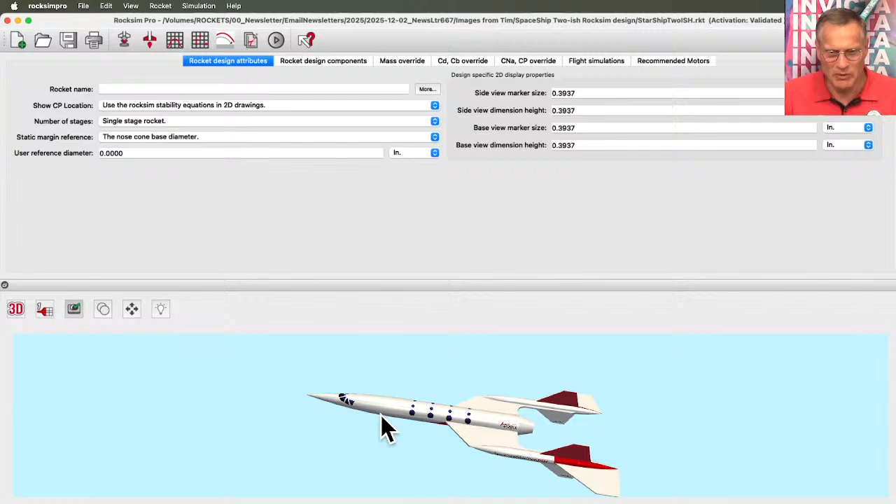So what I've been working on, let's see, I'll bring up RockSim Pro. As you can see here, here's that Spaceship 2-ish design. Been playing around with that. I do have the built version right here. Can you see it? You can only see part of it. It's identical, and yeah,

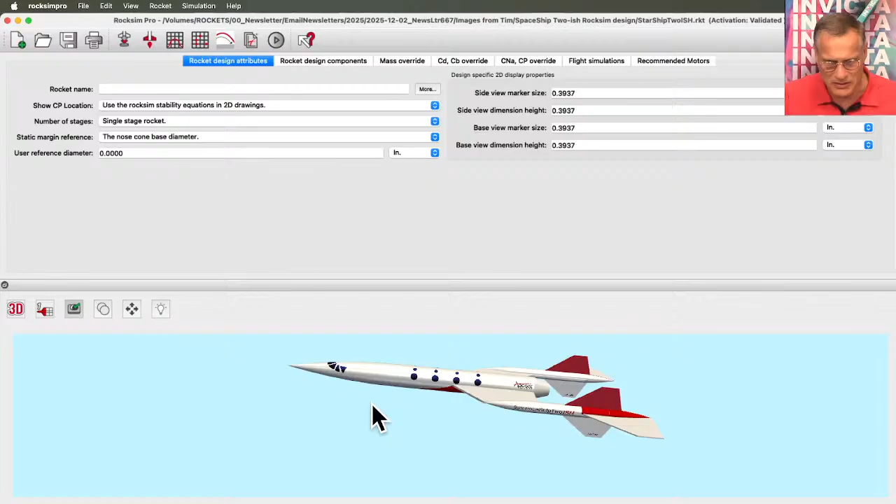it's designed around a 3-inch tube, 3-inch nose cone, and it has 2 side pods, and these are BT55 each. And it's got balsa wood fins here and basswood here on the tails. It's got 5 nose cones, so there's the main one here plus 2 on each of the pods. It does not glide. It's designed to just parachute eject.

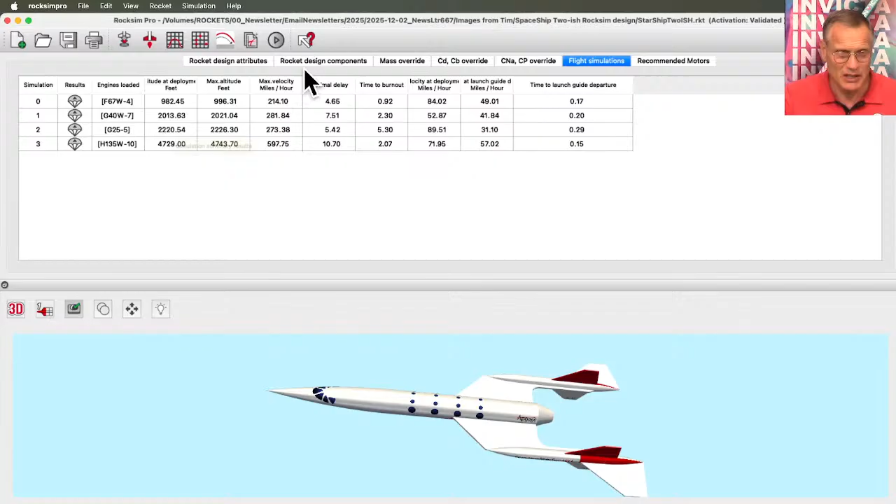And there's something I can show you here. Spaceship 2-ish is the name of that. And let's save that. Let's run a simulation. I'm looking at these previously run simulations from Martin, and a G25 puts it at 2,200 feet. Wow, that's pretty good. It's a pretty light rocket. Mine that I built was only like 500 grams. This one here in the file shows 625, so it's really close.

Let's see. Let's launch it. Let's choose an engine, and let's launch it on an F first. I want to see what's kind of the lowest power F that I can put in there. Let's try the Estes F15. And the delay, let's make it a 6-second delay.

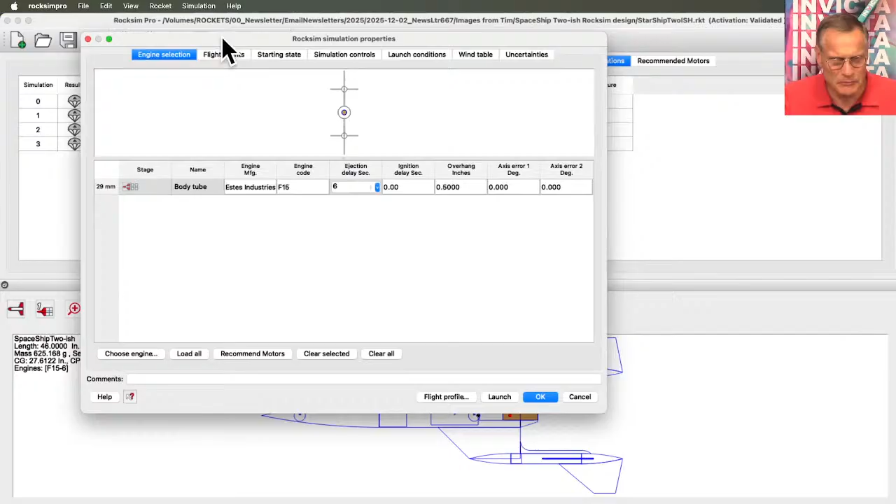Let's see what it looks like. So hit the flight profile, and it will run the simulation, and then we'll just see, are we going to be an okay launch? This is the launch visualizer. It's loading, and I don't have any maps in the background. Yeah, so we don't know where we are. But it's only in the air for 34 seconds, so it's taken off. It didn't weathercock too much. Still going up, coasting. There was apogee, and now it's coming down.

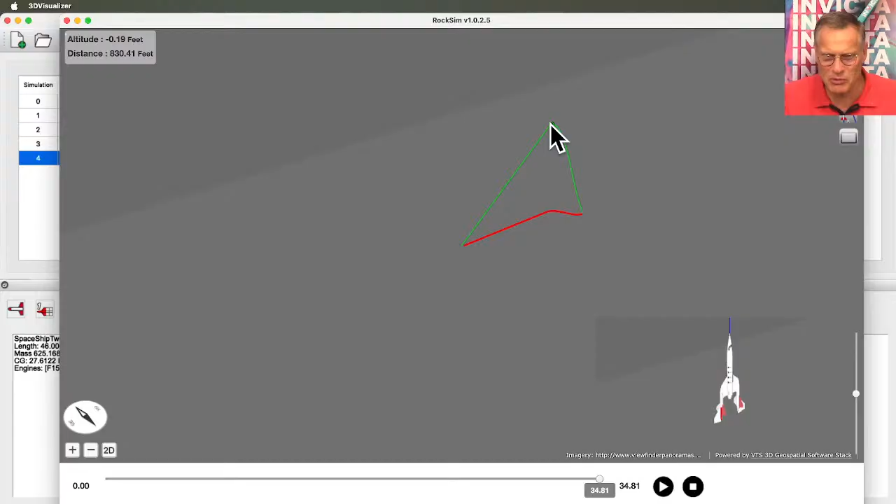Let's bring it all the way back down to the ground, and let's go to a trajectory. Just kind of see what the trajectory looked like. The launch point was right here where my cursor is. It went up to here, is apogee, and this red line is the ground track. So now we're not seeing any maps, any terrain, so it's hard to tell where we are. We're somewhere on this globe thing.

Why don't we have any maps? Well, I'll tell you why. It's because there's a lot of people using RockSim Pro right now, and we have a problem with Google. We reached our allotment of map tokens, and it seems to be happening almost every day now, and we're trying to get more, but Google wants us to put their logo on the maps. And we're trying to do that right now to make Google happy. And once they're happy, they're going to give us more map credits. And then we can display the map.

So every day we get a certain number. And I can tell if I'm not seeing the surface area in the maps, in the ground, it means a lot of people are using it, and they're just sucking them all dry. Oh well. Yeah, we're working on that problem. It's a high priority, because we're giving away the software essentially free, and people are using it. And you know, you still got all the other features, but still, that's like the major feature to use it.

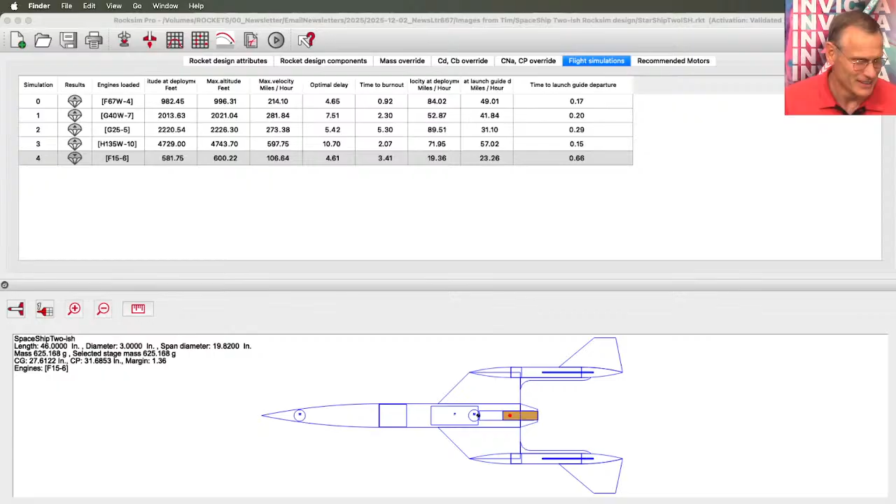Anyway, so was that F-15 any good? So it deployed at 581 feet, and it went to a maximum altitude of 600 feet. Maximum velocity of 106 miles an hour. That's not very fast. What I'm looking for is the velocity at launch guide departure, and that's this column right here. I want to see that number above 30 or really close. 23 is too slow. So I would not launch this rocket with that F-15. So let's try some different motors in here. See if we can have a better choice. So the 15 is too low.

So if you know your motor designations, the F stands for how big the gas tank is. So an E is 40 Newton seconds or less, I'm sorry. So 40 to 80 would be an F, and a G would be above 80. So it's kind of like a measure of how big your gas tank is. The bigger the number, the bigger the tank. And the bigger the tank of gas, the further you can go, the higher you can go in general.

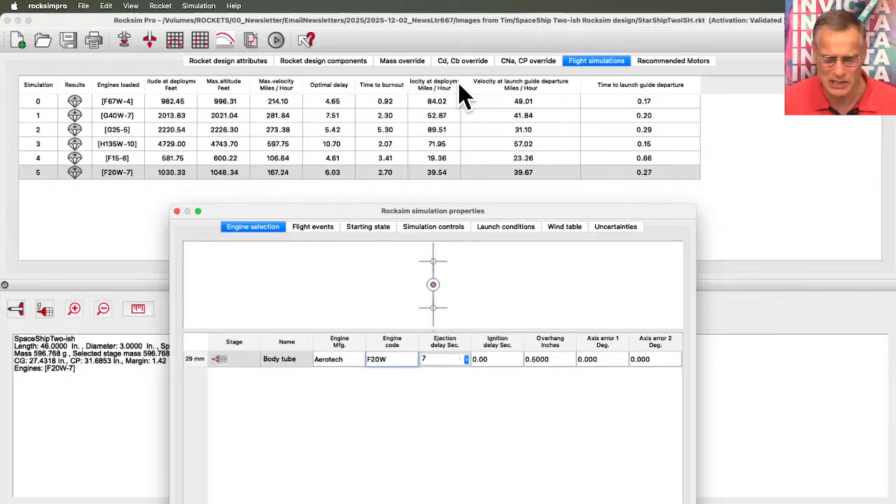The optimal delay is 6 seconds, so that's okay. Time to burn out is 2 seconds. Velocity at deployment. Okay, so this velocity at deployment. Oops, let me cancel out of this. Velocity at deployment is 39 miles an hour. So I want this number below 50, but the lower it is, the better.

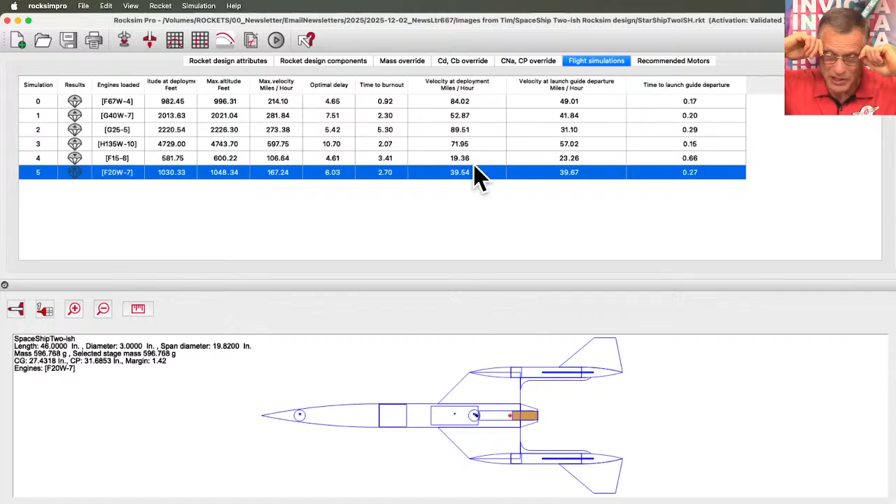When the parachute comes out, ideally you want your rocket to go up, hit a dead stop, then your parachute comes out. And the reason for that is it's less stress on all the strings and on the shock cord because you don't have any forward velocity in any direction. So I want to keep it under 50 miles an hour.

So imagine driving down your road at 50 miles an hour and you throw a parachute out the window. That's moving really fast to be throwing a parachute out. So we want that number as low as possible. We could get it lower if we had the 6-second delay. So we do another prepare for launch, and this time we change the ejection delay. And where did I see that number? That number was right here, optimal delay, 6.03 seconds.

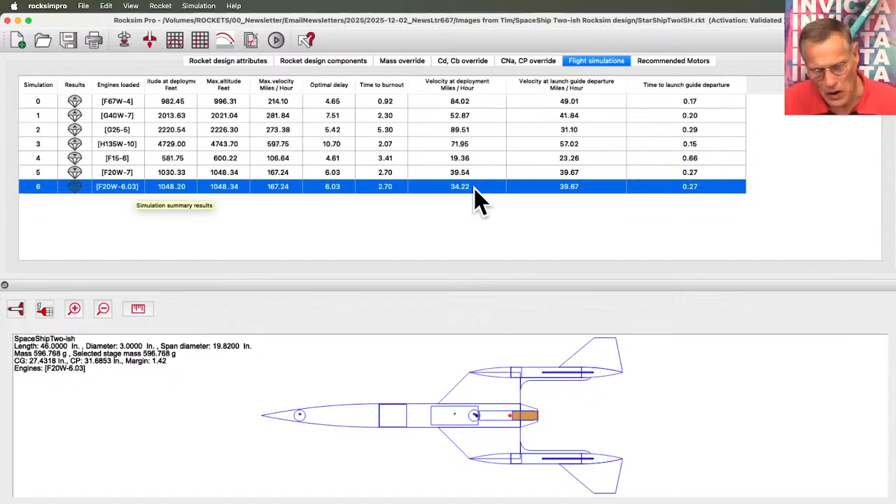So 6.03, hit the tab key, hit launch again. And see, now we have the F20-6.03, and our velocity is lower. It's still not quite low enough. And if I look at this arrow here, that tells me that the rocket was going downwards when it deployed. But that's the optimal delay. That's like right at apogee.

So it tells me this velocity is not a vertical velocity, it's a horizontal velocity. So the rocket somehow went sideways. And that's what you would see in the launch visualizer. You click on that button, you open it up, and I'm just going to zoom it all the way, right here. And if we zoom out and go to trajectory view, and if I spin it around, so we're looking at it from the side, whoops.

Okay, so imagine here's the launch pad right here. It arced over into the wind. See, it had velocity going sideways, kind of towards the west. And that's where that 34 miles an hour came from. The only way to prevent that is to make sure it doesn't weathercock. And there's two things you can do. One is a higher thrust motor. Again, push down on that accelerator pedal faster so it just cuts right through the wind.

Or the other thing you can do is angle it with the wind. We were angling this rocket, I think 9 degrees to the southwest. If we try a straighter launch, let's see what happens. So you go to the starting state, and we want to change this to 0. So that's this launch guide angle from vertical. It's 0 degrees, hit tab and

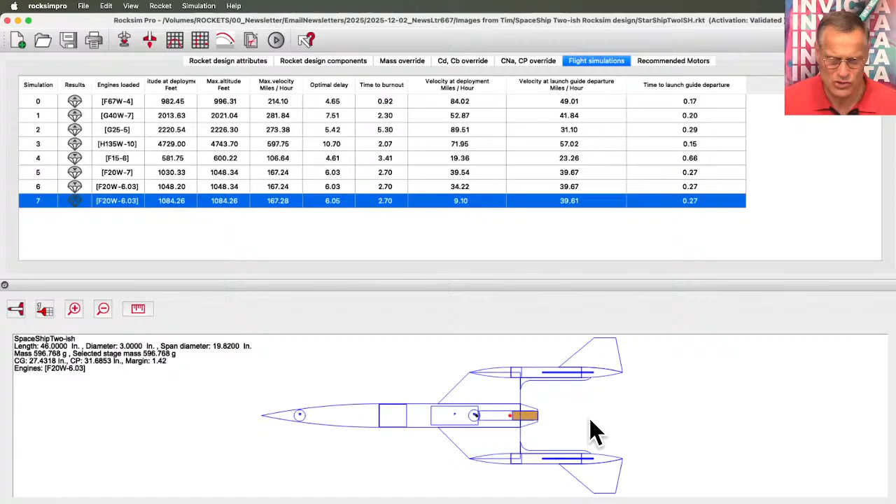launch. And yeah, look, now we got a velocity of 9 miles an hour. So now we're really slow. That's a good number right there. I can live with that. And that was all because we didn't allow it to go sideways rather than vertical.

Okay, Alfred Indy is here, and he says, it looks like the Lech jet that I am building in Michigan. This is not the Lech jet, this is the Spaceship 2-ish. The Lech jet, let me open up a browser.

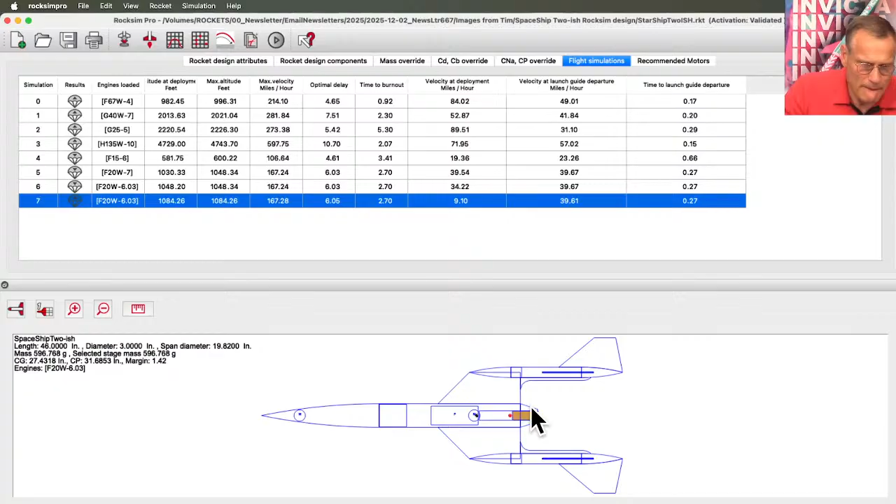Okay, like I said, next week we're going to be releasing these tail cones. Let's design a new rocket using one of those tail cones. So to start a new design, you hit the new one up here. Save my changes, I'm going to say yes. Okay, so to design a rocket, we're going to go across these tabs, starting with the design attributes. And we're going to specify this one. What are we going to call this name? Let's say boat tail rocket. Let's spell rocket right. Man, oh man. There we go.

Single stage, side view marker size. Let's make this a 0.5. This is the size of the CG and CP symbols. It doesn't do anything to the design. It's just so that you can see those symbols better when you do a big rocket. And this is going to be a bigger one. We're going to try a BT-80.

So right now we clicked on nose cone. And I need to find a BT-80, which is 66 millimeters. Do we have a different one? That's a 56. Let's see what this one looks like. No, that's not the one that I want. So go back to database, choose from database. Diameter. Apogee there. That's the one that I want, the PNC 66. All right, so there's our nose cone.

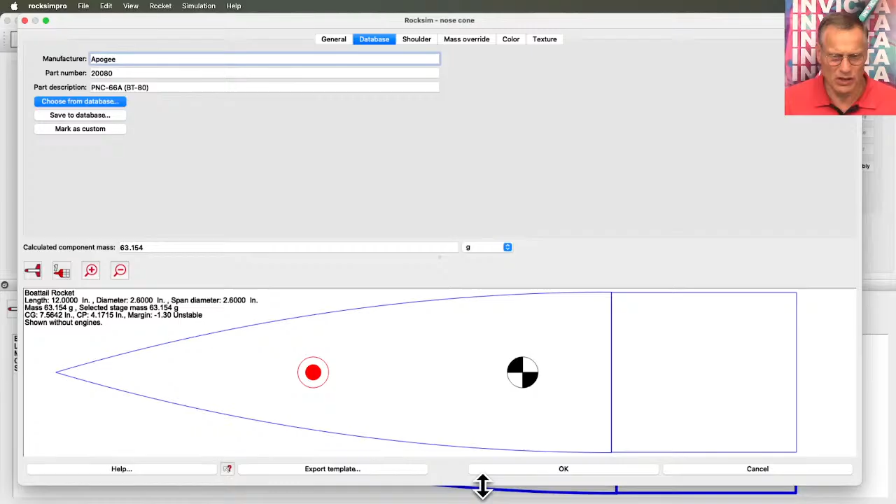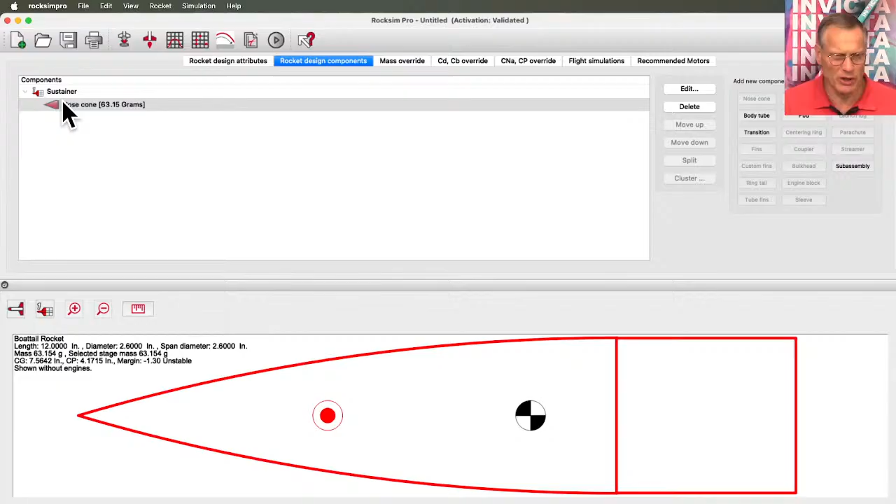Let's change the color. What are we going to color this thing? This is the 3D color, so let's make it red. And the 2D color will also make it red. Okay, so we got our nose cone right now. The next component we're going to add to the nose cone is a body tube. And now I'm looking for that 66 millimeter, which is 2.6 inches. So I'm going to scroll down to 2.6 inches. There's the 74 millimeter. There's the 66. That's the one that I want. 66 millimeter nose cone, 66 millimeter body tube.

All right, so next, let's color this one. So we had a red, and we'll also make it red, but I want to give it just a slightly different red so that we can tell where the nose cone stops and the tube starts. And in the 2D color, we'll make it that color there. And click OK. All right, so I'm going to save it, so I'll throw it on the desktop. We're going to call this boat tail rocket. All right, so it's sitting on my desktop now. It's easier to save.

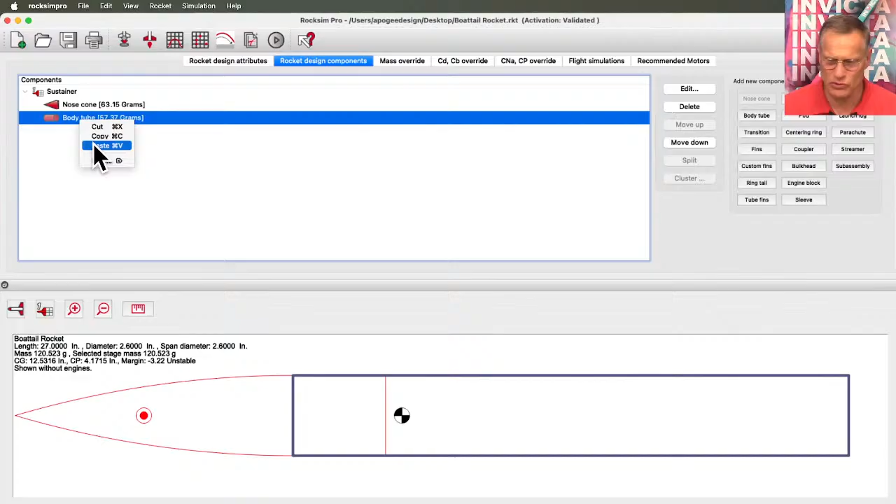Okay, so now we need a motor mount. Actually, I think I want to extend this tube longer. So I'm going to add another body tube. Actually, I'm going to copy that body tube, and then simply select it again and then do paste. So I'm using the right click on my mouse to get that little menu. So now I got two body tubes. And I'm going to go to the second one. This one I'm going to make a little shorter. I want to make it 9 inches long.

And so you can see that. And when I go to the color, I also want to make the color a little different, just so that I can tell them apart. So when I look at it in 3 dimensions, that's this button over here, select 3D, and there's my rocket. And you can just see the slight variation in color, so I can tell them apart. But overall, it just looks like a red rocket.

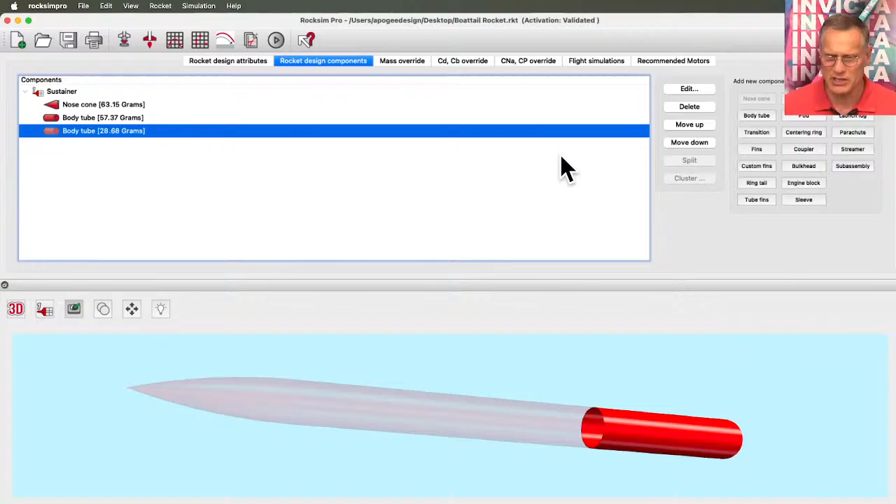All right, so now let's add some fins to this. So this time I'm going to go custom fins. And it looks in the database. I'm going to cancel out of the database. And then it brings up the fin editor screen. Let me make it bigger for you. And so there is the current fin. And this is a set of 3.

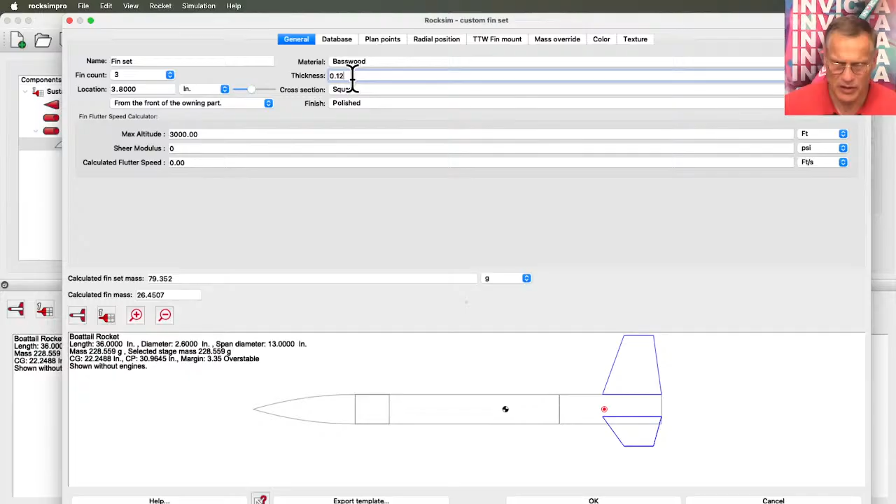And I'm going to go to the plan points. Well, I guess select the material. Let's make these out of basswood. And 1/8 inch would be 0.125 inches. And I don't like the shape, so I'm going to go to the plan points, and we're going to vary the shape. So right now it puts a generic shape there, and then you can go to these plan points and adjust them just by clicking and dragging. And I'm looking down here to see if I like that shape.

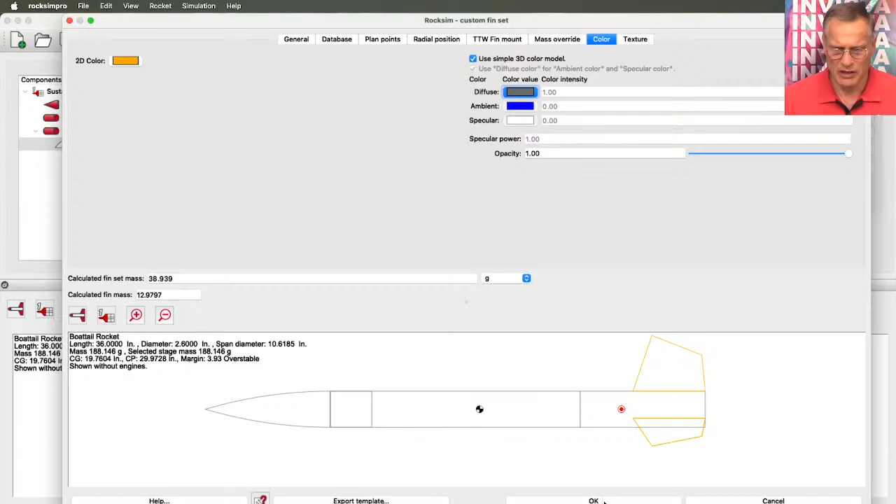I like that a little bit better. So that's the shape of my fins. And we need to give it some color. So in 2D, let's make it orange. And then in 3D, let's make these black, or a very, very dark gray. And click OK. Okay, so now we have the fins on the rocket.

I don't know if I like that shape. We'll leave it for now. We can always adjust it later. All right, so let's put in some tube couplers. So we're going to need a tube coupler right here. So we're going to select this tube and then attach it. Here's the coupler button.

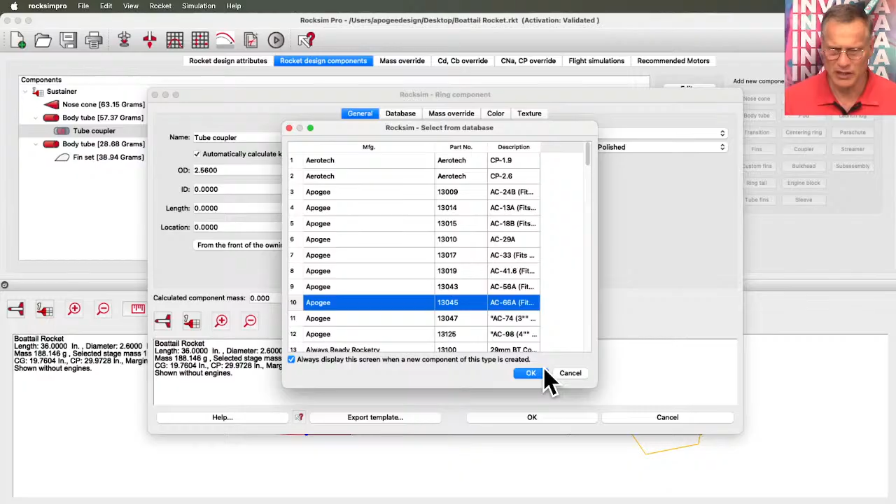And we want a 66 millimeter. So there's the AC 66. AC stands for airframe coupler, 66 millimeters in diameter. We'll click OK, and you can see that it put it right there at the base of the nose cone, or actually at the front of the tube that it's attached to.

And so we're going to move it. We're just going to take that location slider. I'm going to change it from the base of the part. So now we're measuring from right here. If I change the location to 0, it only goes to here. But I know the length of this is 4 inches, so I'm going to say the location is -2 inches from the base of the tube. It puts it right there.

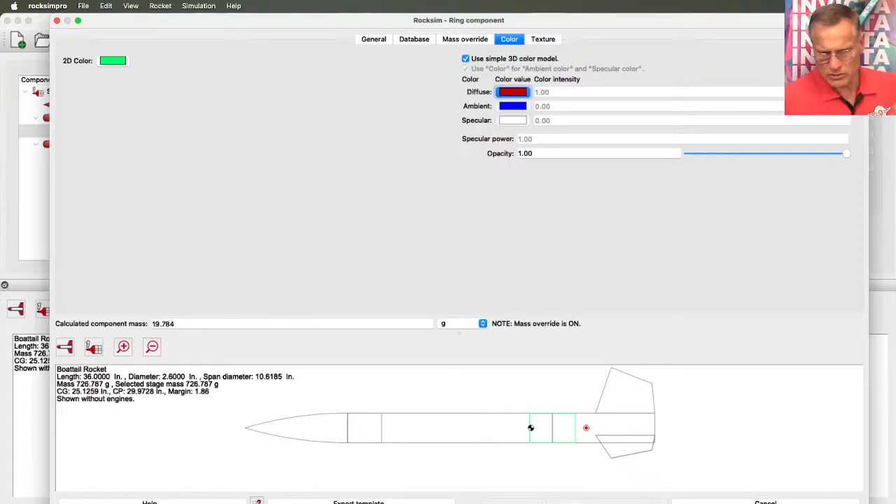Let's change the color. 2D color, let's make it bright green. 3D, we'll make it red. You won't see it, but actually I want to make it a darker red. And click OK. All right, so we got a coupler there. So now we need an engine mount. So I'm going to select the body tube, come over here to inside tube, and

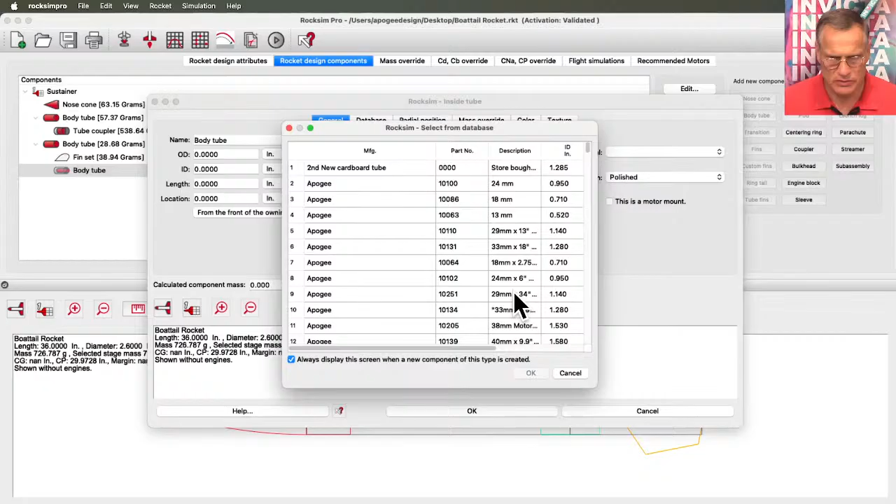let's see, we want a 29 millimeter. And you can see this is way too long. Let me make this screen bigger so you can see what's going on here. Okay, so you can see we got a 24-inch long tube, and it's hanging out here. I'm going to make this 7 inches long. And how do I know 7? Because that's the standard length tube that we sell.

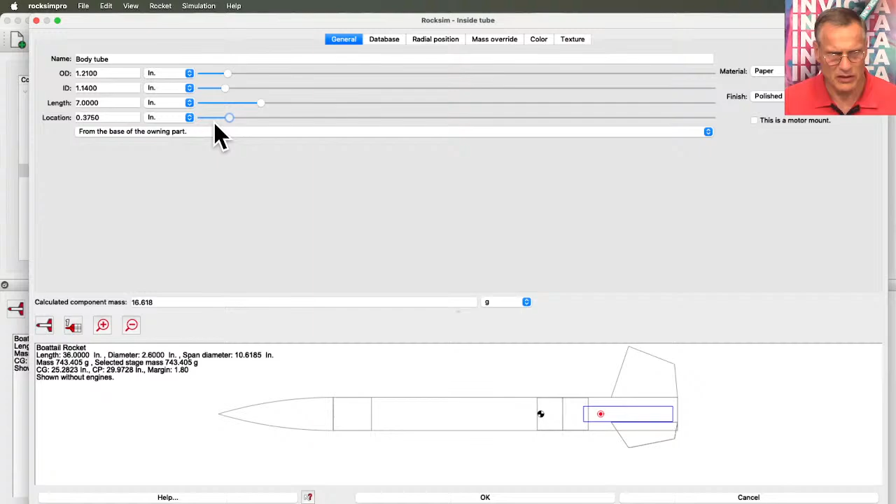Okay, so now the 7-inch tube is not far enough out. So I'm going to change the location. In fact, I'm going to make it from the base of the owning part. And if I was at 0, there it is. But if I make it a negative number, -1 inch, we'll hang it out the back. This is a motor mount, so we need to select that.

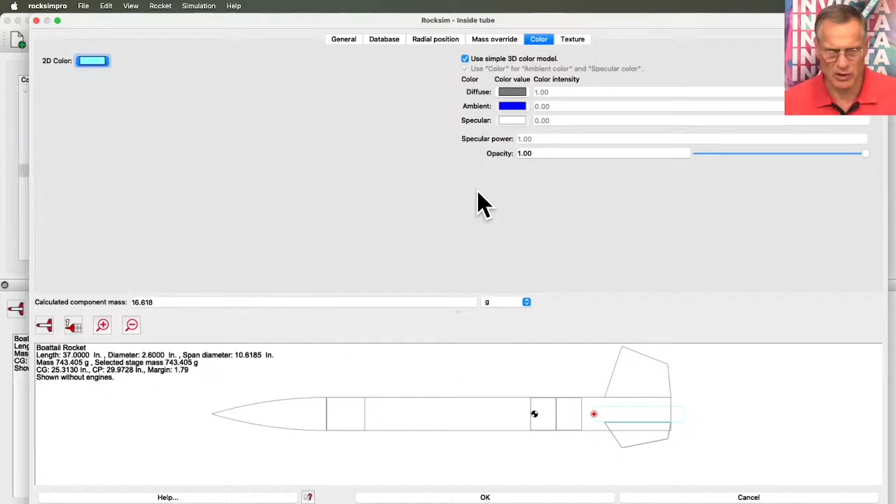See the color, let's make it a black engine mount or really dark gray. In 2D, let's make it that light blue. Oh boy, now you can barely see it. Let's make it something darker. All right, so there's our engine mount tube, and click OK. So now we want to add a boat tail.

So let me go to the Apogee website, and let's go to the home page. And I had just put these new boat tails onto the website. So we want a 29mm to 66 boat tail. Now, basically what I want to get is some dimensions here. The length of this boat tail is 1.86 inches long.

Okay, so here I'm going to select this body tube, and we're going to say we're looking for transition. Here's the transition button, and this is not in the database yet. And I'll show you how to do that because that's what I'm going to do right now. I'm going to add it to the database. Oh man, it does this. I hate when it does that.

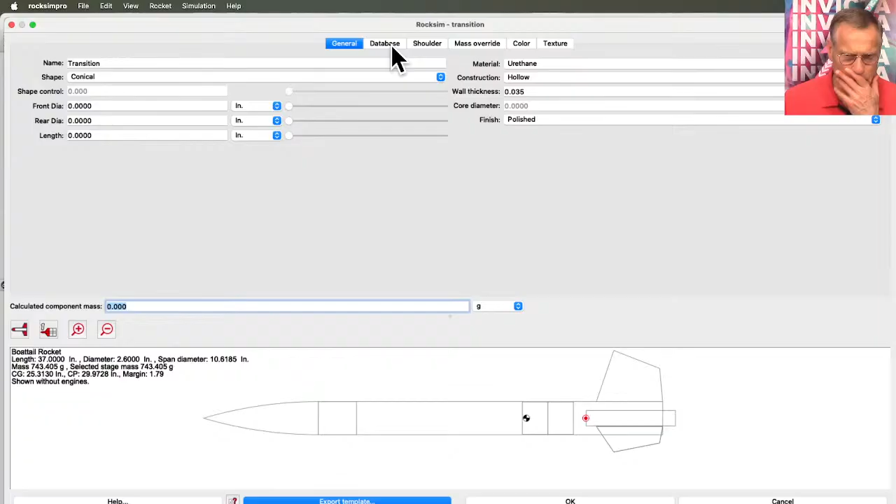Okay, so the material, urethane, and it's not solid, it's hollow. I don't know what the wall thickness is. I'm gonna guesstimate 35 thousandths of an inch. All right, so the front diameter is 2.6 inches because we know that's the diameter of the tube. And where do I see that? Right here. Diameter 2.6 inches. Hit the tab key. Now I got to get the rear diameter, and I'm not sure what it is.

And if I go back to the Apogee website, it doesn't tell me. Also, it tells me it's a 15-degree cone angle. So I don't think I can measure that in RockSim. I could probably do it doing some trigonometry. I'm going to estimate it. We know it's going to be 29 millimeters. It's going to be bigger than that.

So let's make it, let's call it 36 millimeters. And then the length of it, now this one I can get from the website. The nose length is 1.86 inches. And if I hit the tab key, you'll see that's the boat tail.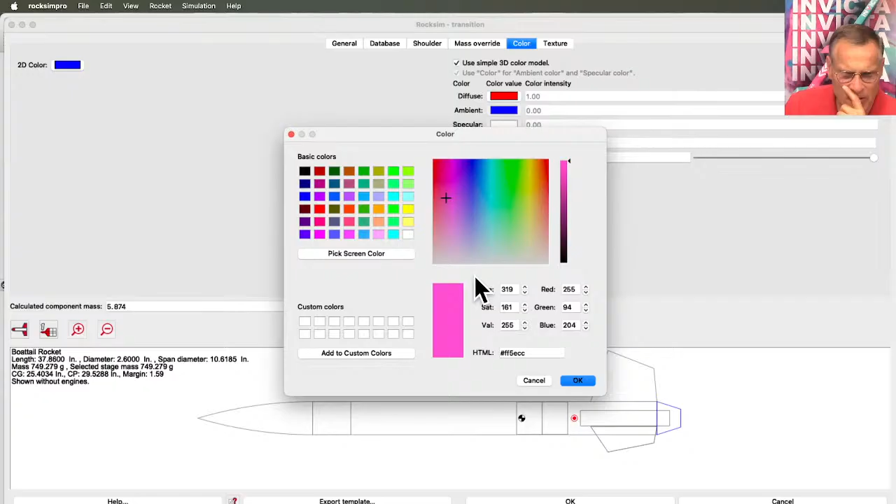And let's give it some color. We're going to paint it red. Click OK there. And then the 2D color, let's make it this color. Click OK.

Still no other questions. I'm waiting.

Oh man. Okay, so we got this tail cone. Let's go back to the general tab. Right now, it says the wall thickness is 0.035, and it's telling me the mass is 5.87. So this is a tail cone retainer. So actually the mass includes the base that gets glued onto the back of the motor mount tube, which is right here. So this plus this equals 18.7 grams.

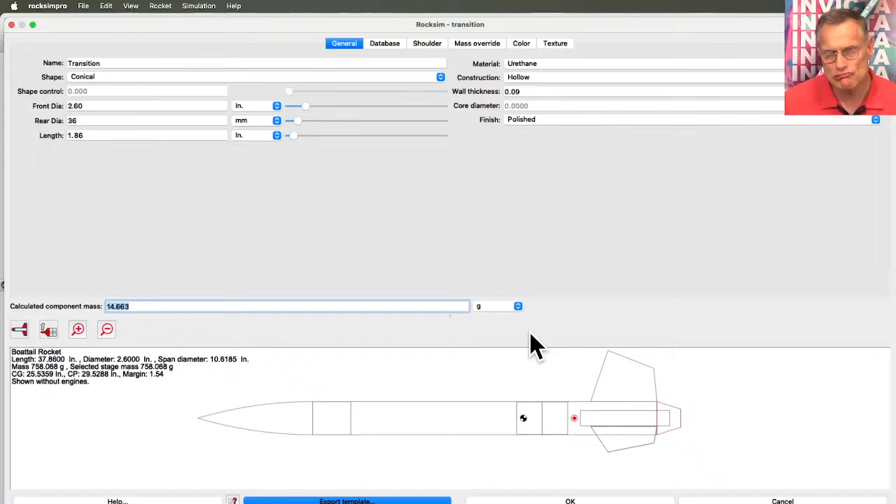So what I'm going to do is I'm going to change the wall thickness until this is closer to 18 grams. I don't think it's going to be like 0.09. 0.09 is 14 grams. That's like too big. So what I'm going to do, yeah, I'm going to leave that. I'll leave that. And this does have a shoulder on it.

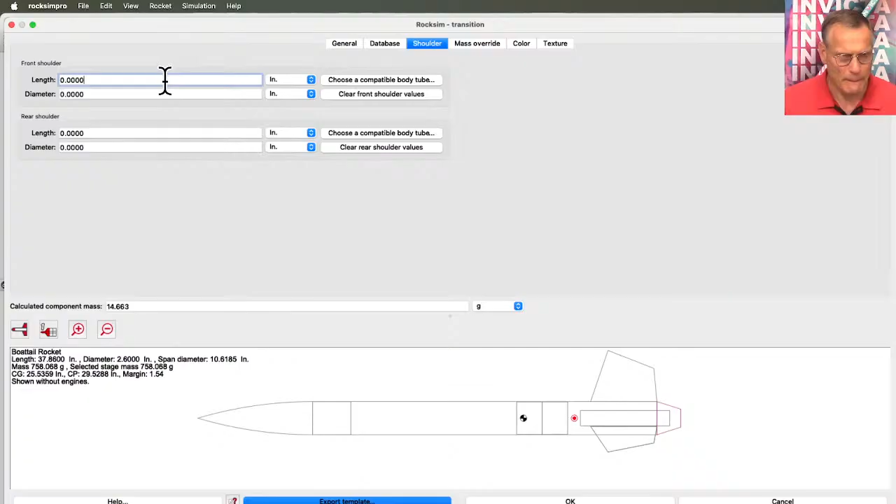And I know the shoulder length is 0.16 and the diameter is 2.509. 0.16, 2.509. And you can see if I zoom in that, yes, it has added a shoulder to it. It's very small. And I'm going to click OK.

So now the other thing I need to do is to move that body tube back. So it needs to go all the way back to about right here, approximately 1/4 of an inch off of the back, because then we're going to put on the base and it gets glued on. So let's go body tube and edit this first. I want to make this longer. I want to bring it all the way almost to the end.

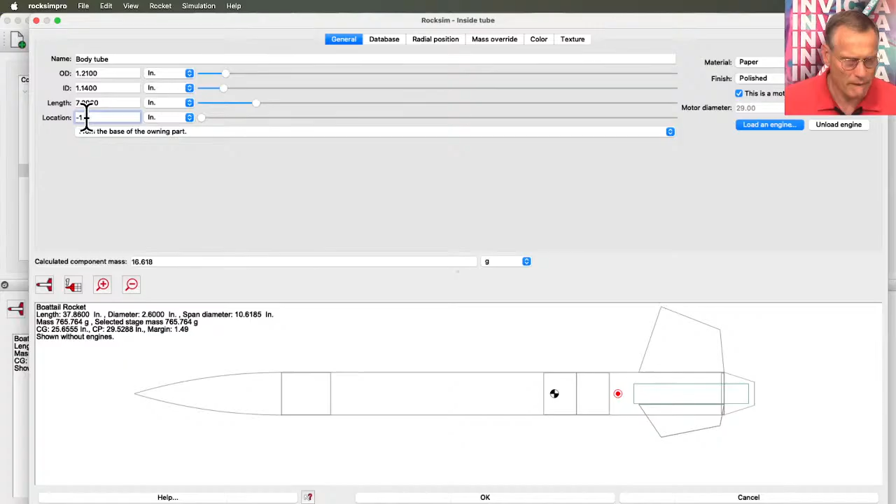Actually, I'm going to have to change the position. I need to go further back. 1.5, hit tab. Ooh, that's close. Let's go 1.7. Okay, so I'm looking at that distance there, and I'm thinking that's probably not enough to have the thrust band of the motor inside of this cone. So let's go to 1.6 inches. Let's see what that looks like.

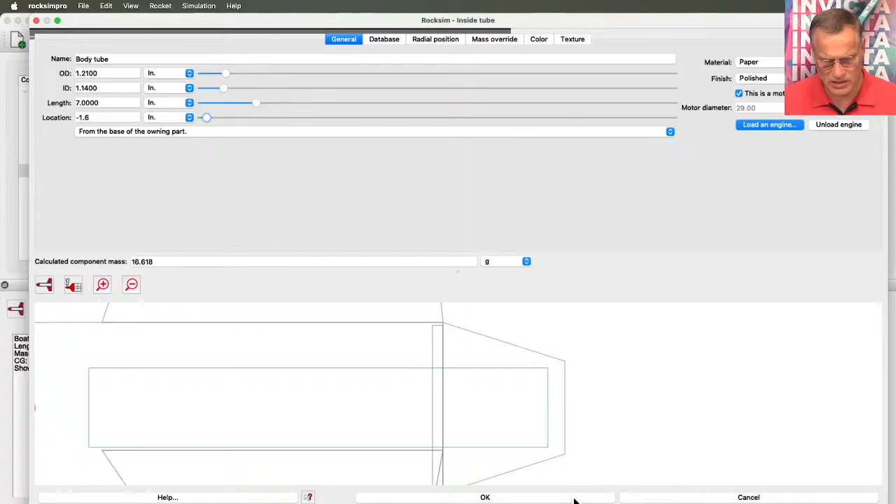That looks pretty good. Okay, so now we said that this tail cone, what was the weight of it? 22 grams. That's too high. It should be 18. So go back to this one. And I want to change that wall thickness here. Let's make it 0.08. Now we're at 19, so it's a little bit smaller than that, 0.07. And so this is going to include the base as well.

There it is. We're 0.075, I think. It's probably going to be really close. 18.74. This one was 18.7. That is like really close.

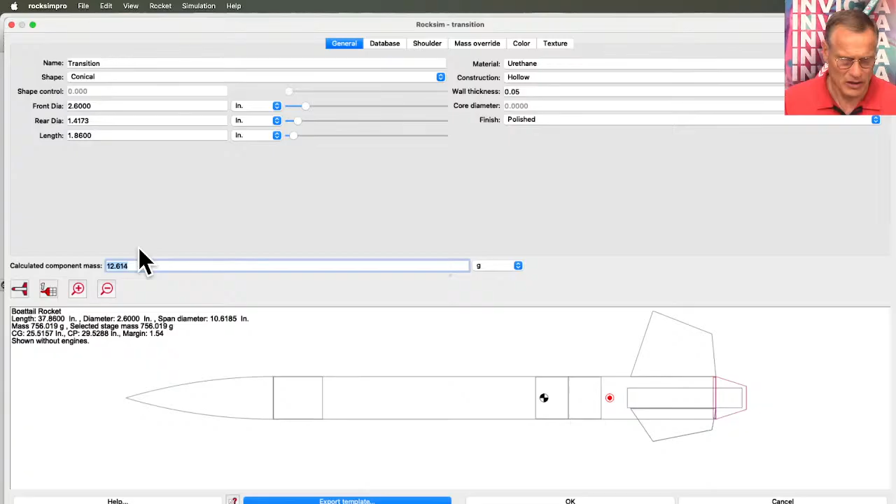0.065. 16. It's not quite small enough. Nope. 0.05. So now we're at 12. Now we're too low. 0.055, 13.8, 0.056. There we go, 14 grams. Oops, cancel. So now I can add a mass object back here to account for the base.

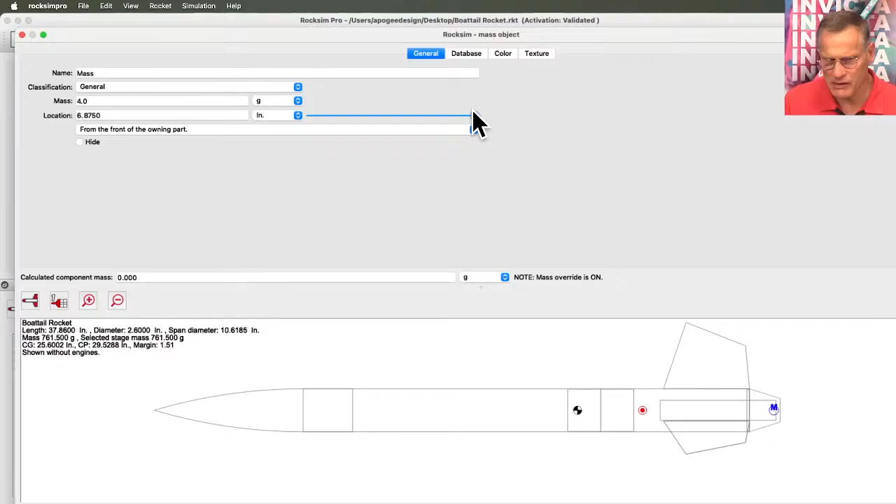And to do that, we'll select the tube, because that's where we're going to attach it. Click mass object. Click cancel out of the database. We're not going to look in the database. And it's going to be a general mass. And we said it's going to be 4 grams. So there's the 4 grams. And now we just need to move it over to here, because that's where it's going to get glued. All right, so that looks good.

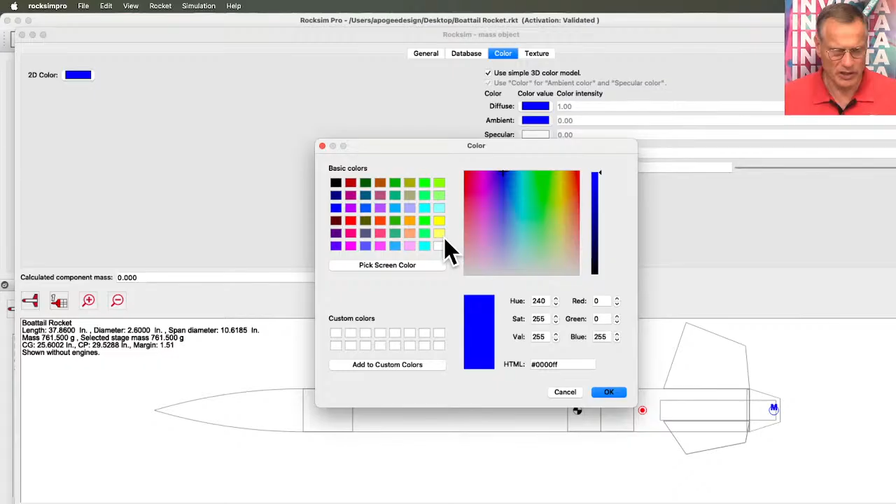All right, so we got that tail cone. Let's say we'll call it tail cone base mass. Let's change the color. 2D color, let's make it orange. Click OK. Okay, let's save it again.

All right, so we do not have centering rings in here, so let's add some centering rings. So I'm going to select this tube. I'm going to click on it and then say centering ring. Centering ring, there it is, right there in the middle. All right, I'm going to cancel out of database and just let RockSim calculate it. Now this one I'm going to call the front centering ring. And let's give it a thickness of 0.125, which is 1/8 of an inch.

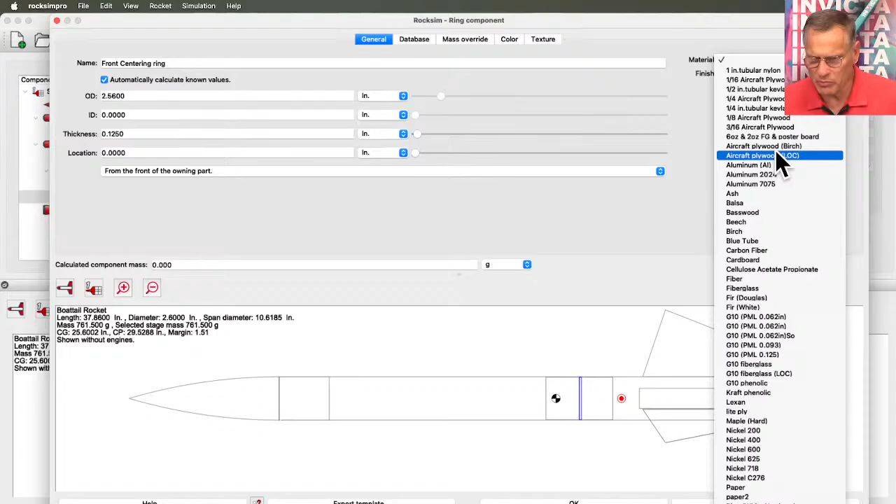So this is going to be made out of plywood, aircraft plywood, birch. So there's the centering ring. Let's move it back. Why is this locked out? Oh, that's the OD. We need to change the location. There we go. Okay, so I'm going to put one right there, and I'm going to put another one back here.

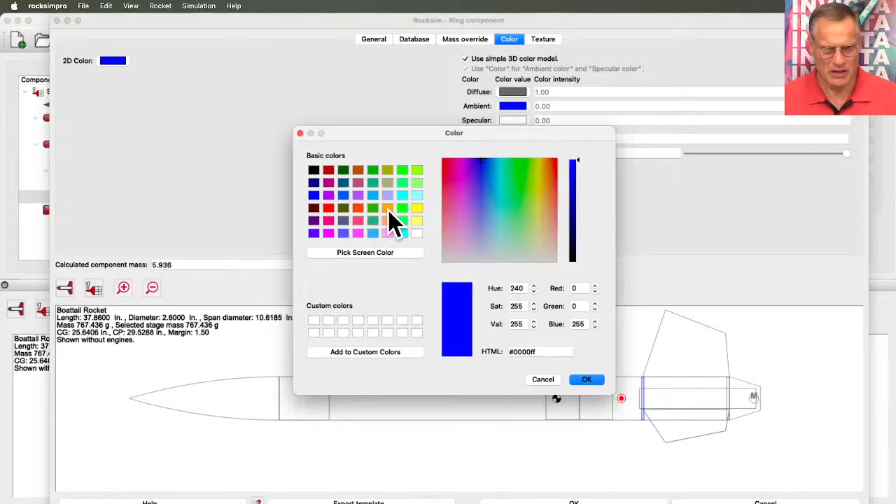Let's change the color first. 3D. Let's make it dark gray again. And in 2D, let's make it purple. Click OK. So there's my first ring, and I'm going to do a copy and paste. So I'm going to right-click, do copy, and then where's it going to be attached? Same body tube, so we'll just attach it there, and then paste.

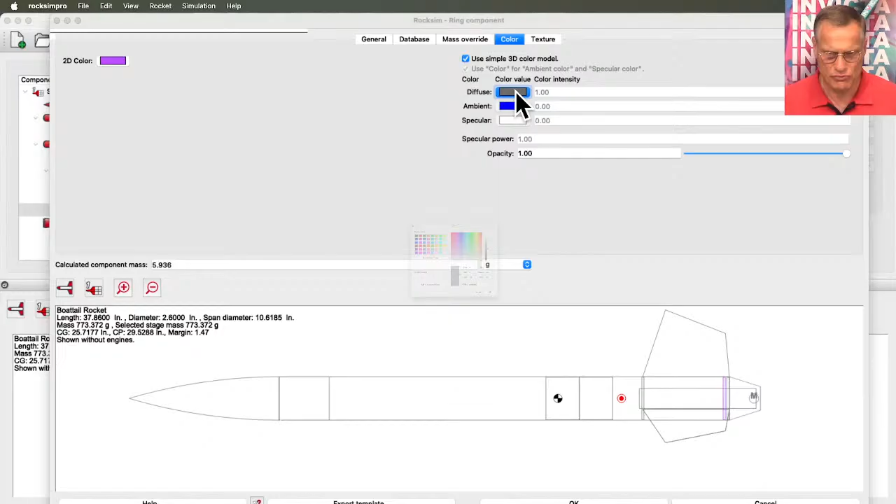You can see it pushed both of them here. They're both called front centering rings. Since we copied one, it's identical in the dimensions and in location. So I'm going to change this one to rear. And location, I'm going to put it right there, right next to the shoulder. Okay, click OK. Oh, I want to change the color. Let's make it that color. Click OK.

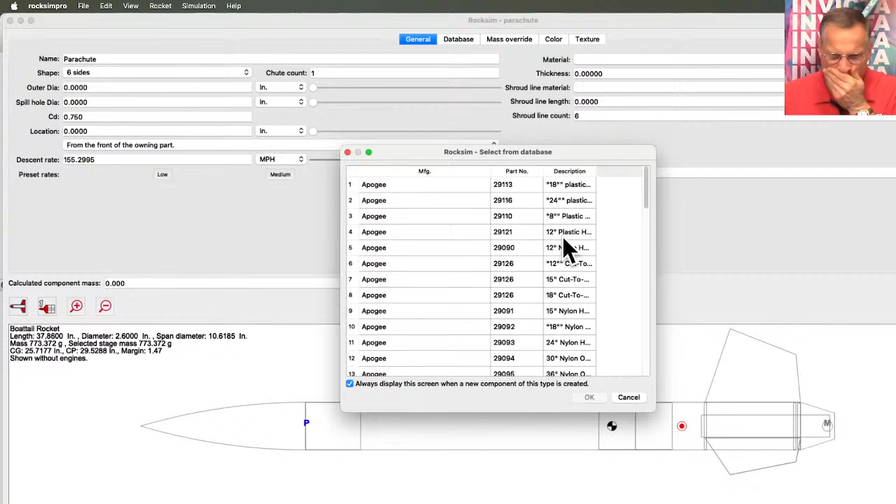Actually, we're doing pretty good here. The only thing we need is parachute and shock cord. So let's select this tube right here because that's where we're going to put the parachute. Come over here to parachute. I'm going to say 24 inch. We'll try that for right now. So there's the parachute, and let's change the location. And we can change the color, 3D color. Let's make it that color so it's easy to see on the ground. And in 2D, let's make it orange. Click OK.

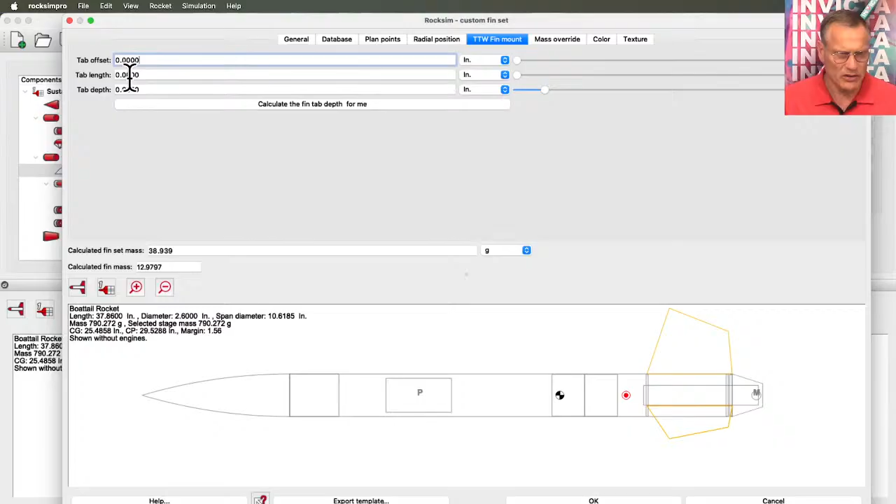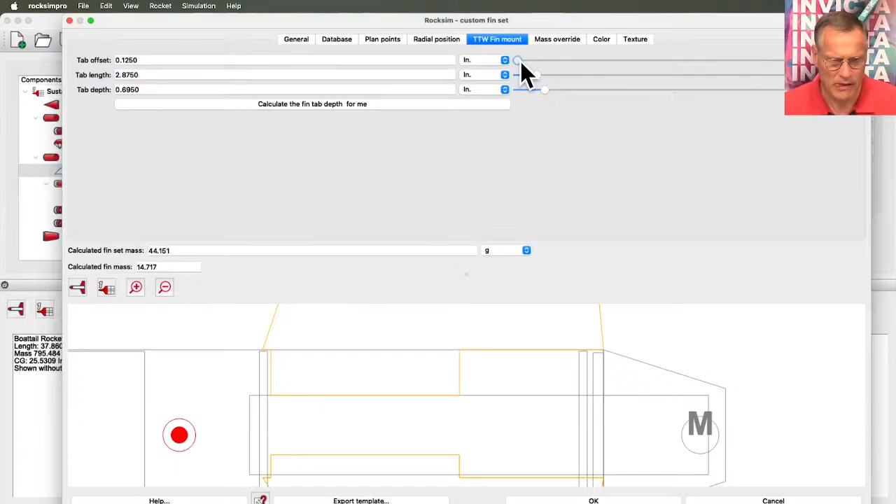So if I zoom in here, you can see that we're almost to the point where we're interfering, but I got a lot of room in the front, so let's change the location. And I think that's going to be okay, 0.125. Yeah, that should be fine there. And then the tab length. Changing the length just by sliding it. That's not going to work, so let's make it too far. Just on that side of the ring. Right there. And click OK. So now the fins have tabs on them, which makes it much stronger, which means we're going to have to cut slots in the tube. That's okay.

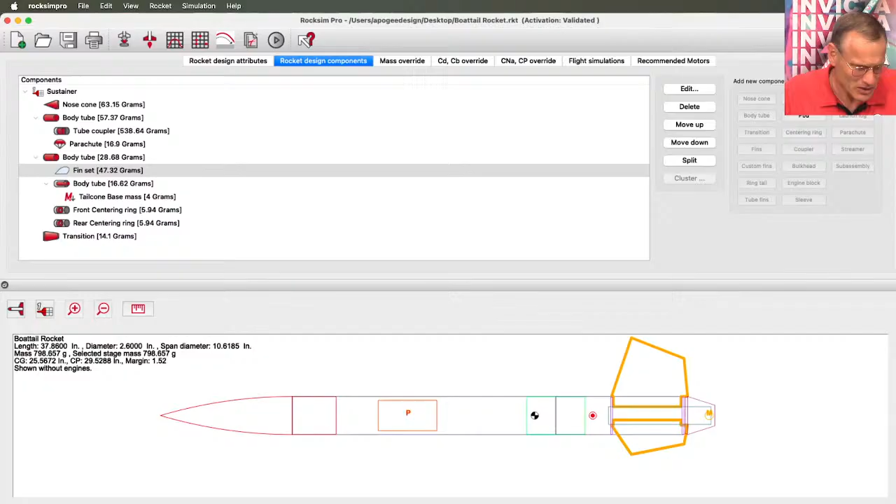A.B. Hobbs has a good question. He says, is it possible to have a mass object with the parachute and not be included in the descent mass? Yes. We'll get to there. And Terry Tiny House Homestead says, are we designing today a reindeer rocket? No, this is a tail cone rocket. I wanted to make a tail cone rocket.

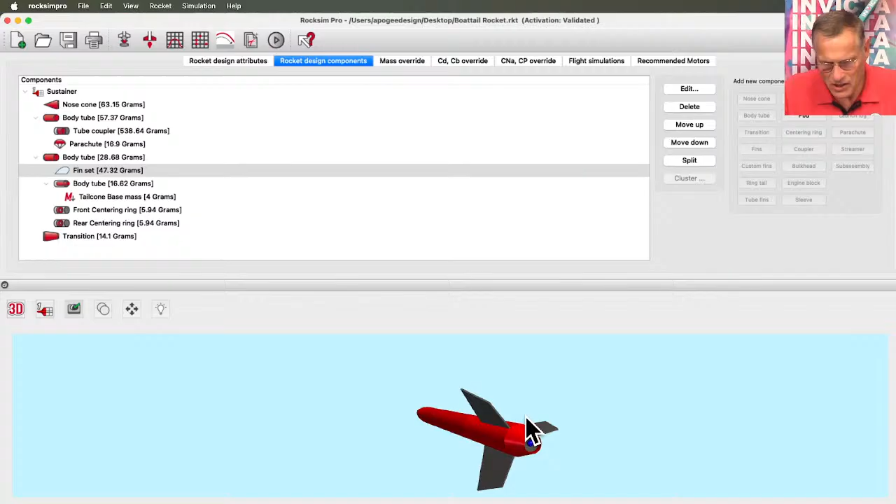Let's look what it looks like in 3D. Hey, that's not bad. I like that. It's got a tail cone in it. This blue object is a mass object. It does it as a sphere. Yes, if we go back to 2D, you can see it's right there. And that is the base mass right there.

Okay, so we have a parachute. We don't have a shock cord. Let's put in a shock cord. So again, I'm going to select the body tube. This time I'm going to go mass object. Let's cancel out of the database. And classification, let's say shock cord. And the material, I'm going to make it 300-pound Kevlar. And I want to make this quite long, so I'm going to change it to feet. And let's call it 15 feet. It only adds like 5 grams, so it's nothing.

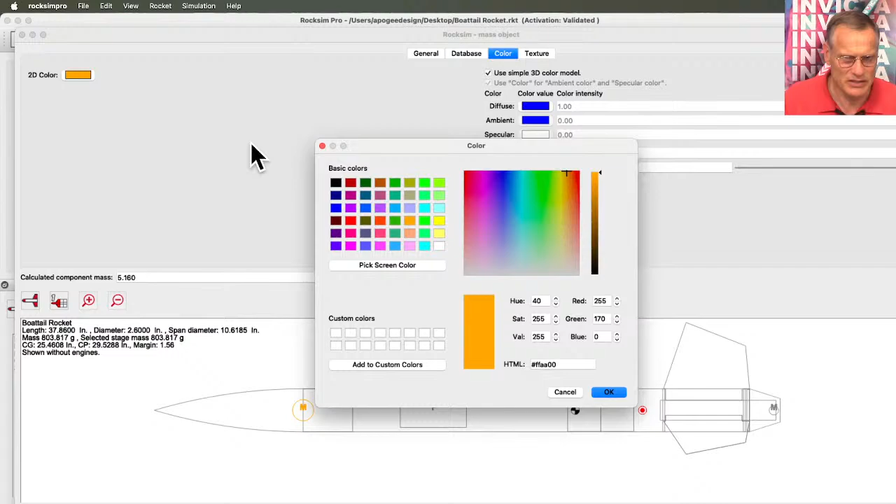And then here's the location. We're going to take this mass. Let's change the color. Let's make it greenish. And then we'll simply go back to location and move the location below the parachute, because you're basically going to wad it all up and shove it below the parachute.

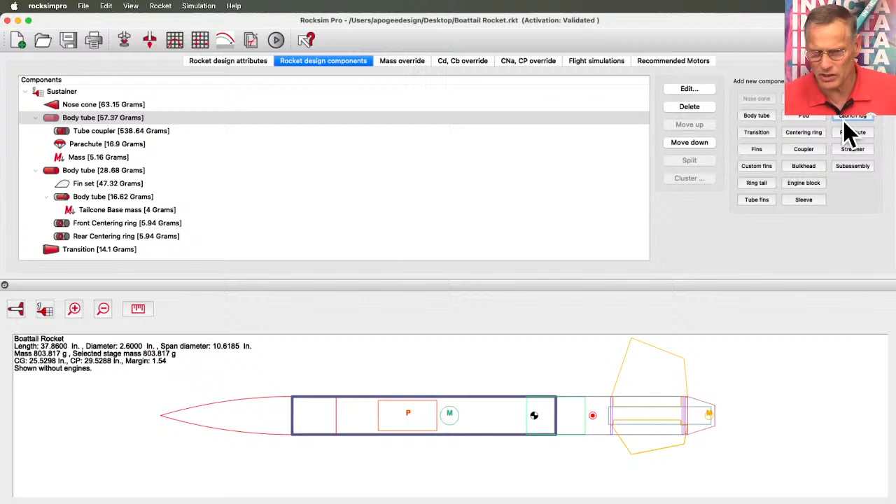Click OK. We don't have any launch lugs on here. Let's put one on each tube. So launch lug, and we're going to say 1/4 inch by 3 inch. So right now, it put it right there, up by the front of the nose. We want to move that down to approximately here.

What we want to do is to span over the center of gravity, but we need a rocket motor in there. Oops. I'm going to take, this is a 3-inch launch lug. I'm going to cut it in half, so I'm going to make it 1.5 inches. Put half of it here and half of it there. The location.

And let's look at it from the base of the rocket, and that's interfering with the fin, which I expected. So let's go to radial position and change the radial angle. Let's make that 70 degrees. And the color, we got a red rocket, so let's make it red. And in 2D, make it pink. Click OK. So it's showing it right here.

Now I want to duplicate it, so I'm going to do copy. And I'm going to go to this body tube and say paste. But remember, it puts it where this last one was located from the front of the tube. So the front of the tube is right here, so it has to go that far back. So for this launch lug, the front of the tube is here. So again, same distance from here to there as from here to here.

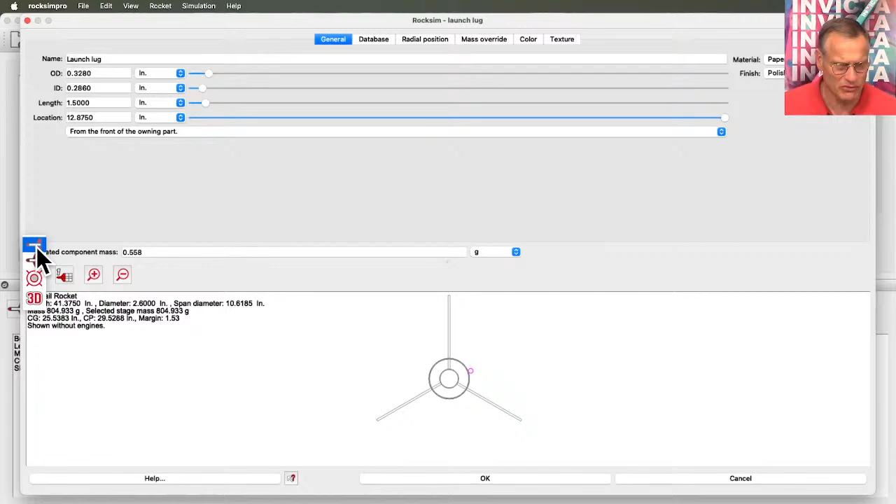Okay, so I'm going to edit the location of this, and I'm going to go back to the side view. And I think I want to put it a lot further forward than this. All right, click OK. And now let's load a motor. Choose an engine. Aerotech F27. I don't know how long the delay should be, so I'm going to select the longest one. Click OK. Flight events, deploy at maximum ejection delay, launch conditions, same as before. And let's just launch it, just to see what it looks like.

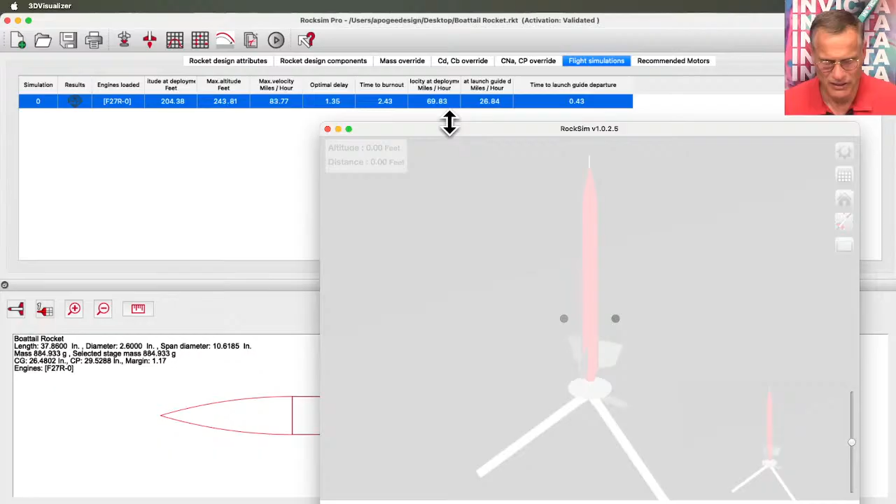Oh. Well, it's not looking like what I wanted it to look like because I wanted to see terrain, and we're not going to see that. So there's the launch lugs on the side of the rocket. And you go to a trajectory view, and then launch. It says we're going to be in the air 11 seconds again. Again, we're arcing over. And then coming down. It's not terrible.

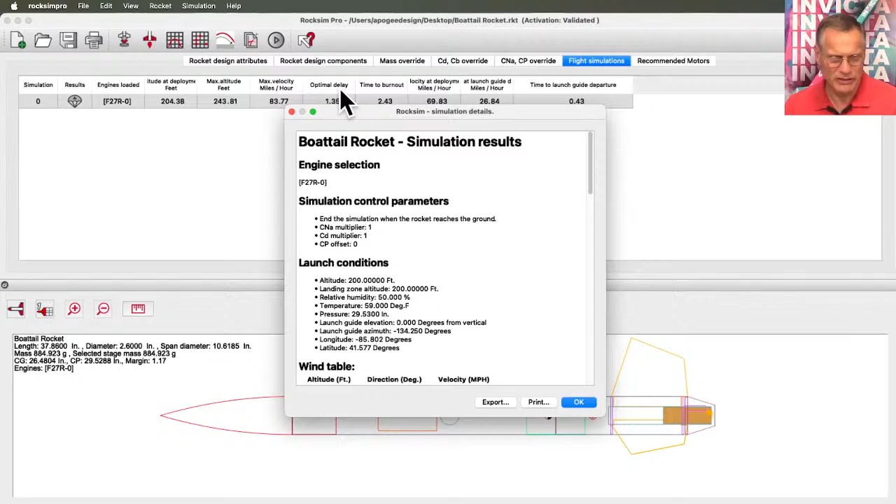All right, so we're going to cancel out of that. So this says time to burn out. Optimal delay is 1.3. Ooh, I had an F27-0. I wonder why it didn't go very high. So let's change that. Oops, wrong one. Go back to load engines. Or double click on it. Or go to prepare for launch. F27. Let's go with an 8-second delay and launch.

All right, so it went a little bit higher. Optimal delay was still pretty short, 3.08 seconds. And yeah, that looks fine. Velocity at deployment, that's pretty high, so it must be arcing over. Again, we can come here to the launch visualizer and at least see what the trajectory looks like, even though we don't have any maps. So my rocket is right there. Launch.

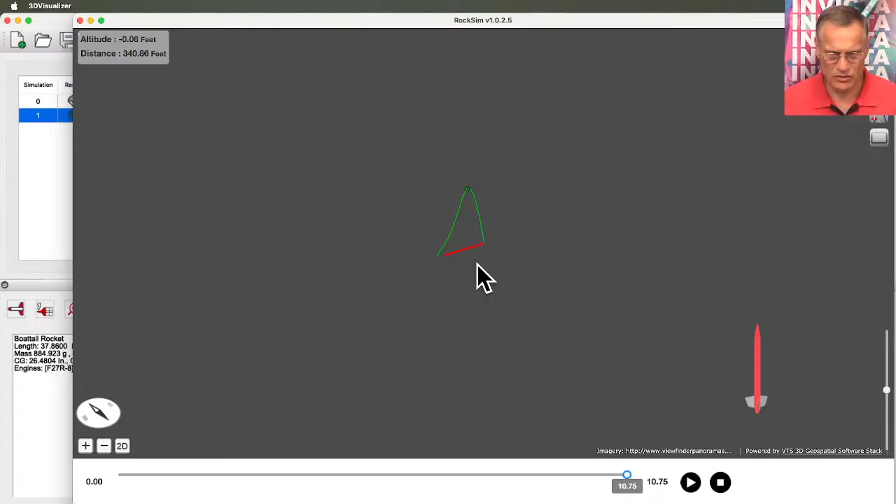Yeah. Oops, lost my microphone. Okay, so I'm just trying to see what's going on here. That's not terrible. All right.

Okay, so the question was, how do you add a mass into the rocket that basically is like ballast, and we're throwing it out? So the only way to do that is to do it like a strap-on booster pod. And you can put it on the inside of the rocket, and then at ejection, it's ejected out. Alfred Indy says, I'm just reading this other question. I should answer this one first. So let's build this into it.

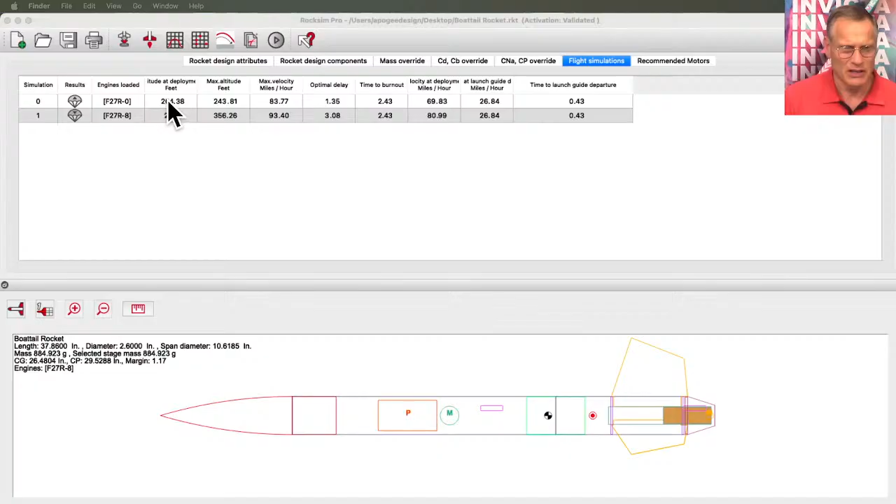So the question is, is it possible to have a mass object eject with the parachute and not be included with the descent mass? So we're going to go back to the rocket design components. First, we've got to figure out which tube we're going to put it in. So we're going to put it into this one. Click on that, then go here, we are looking for pod. There's pod. So a pod is a placeholder we're going to attach other parts to. So right now this placeholder is right there. We can move it to here. We can adjust the radial position here.

And we're going to uncheck both of those. And right now the radial distance from the center line, since this is a 2.6-inch tube, half of 2.6 is 1.3. So if we want to move it to the center line, we need to make that 0. So now it put it inside the rocket. And we'll click OK. Oops, I needed to go back there. There's the pod. And I say this pod can be ejected during simulations. So when the parachute comes out, it will eject.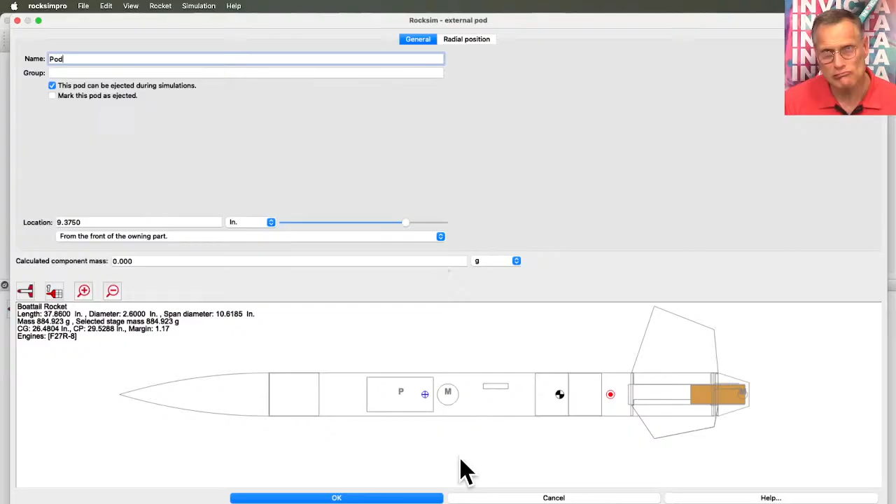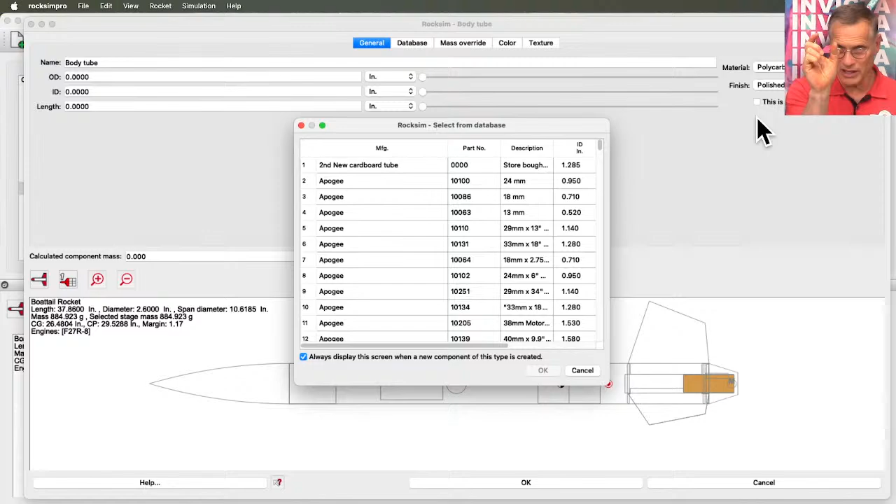I think so. Let's click OK. Now we're going to add a mass to this pod. I want to do mass object, but it's not letting me, so the next closest thing is a body tube. So this is going to be a cylinder-shaped mass. I'll make it 13 millimeters in diameter. You can see right there is this tube, and it's 18 inches long. Right now I'm going to make it like 3 inches long.

Its current mass is 0.918 grams. I want this thing to weigh a lot, so I'm going to change the material to steel. If I change it to steel, now I got 6 grams. And to make it heavier, I'm going to make the inside diameter 0. And now we're at 88 grams. That's way too heavy. So 2 inches, we go down to 58. I want it like 20 grams.

So 1 inch, 29 grams. Let's make it 0.6, 0.65, 0.655. Let's make it 0.66, 0.669. Oh, we're so close, 0.67. I can't get this to 20 grams. 0.68. There we go, 20 grams. So we got a mass right here. Let's change the color of it. Make it orange. And in 3D, let's make it purple.

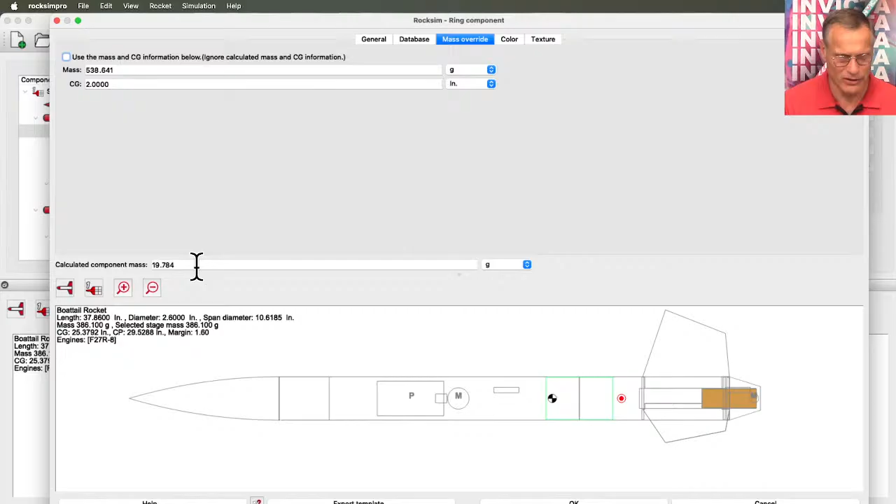Okay, so there's this mass inside the rocket, and it's going to eject with the parachute. So right now our rocket, holy cow, weighs 904 grams. Why does it weigh so much? What is heavy in here? Oh, this tube coupler. That's how you find out what's too heavy: you look through the parts list and see what's heavy. So this tube coupler, what's wrong with this? It says right here the mass override is on. So let's go to mass override and uncheck that. Now that is 19 grams, so that's okay.

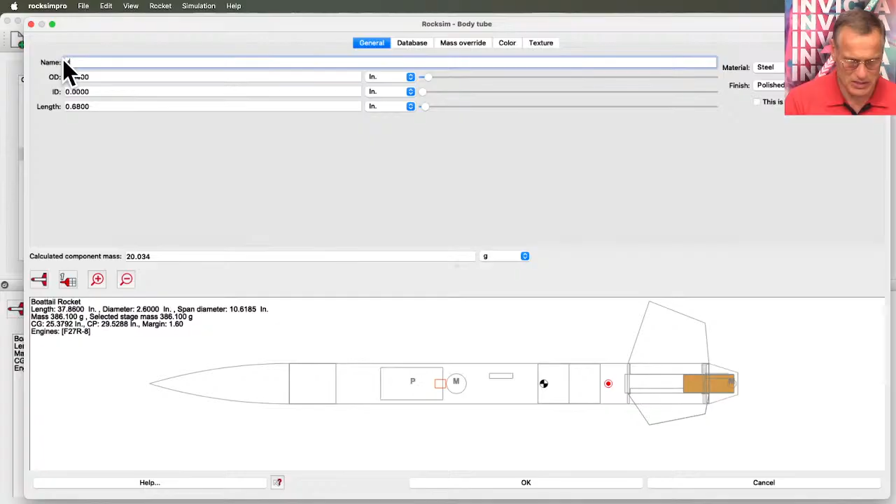Okay, so now our rocket mass is 386. That still seems kind of heavy, but we got a rocket motor in there, and I don't see anything else that seems out of line. So we got the pod and this body tube. Let's change the name of this to just drop mass. And click OK. All right, so now let's launch this rocket. Okay, so now we're going to 1,280 feet. So now how do we know that the drop mass fell out?

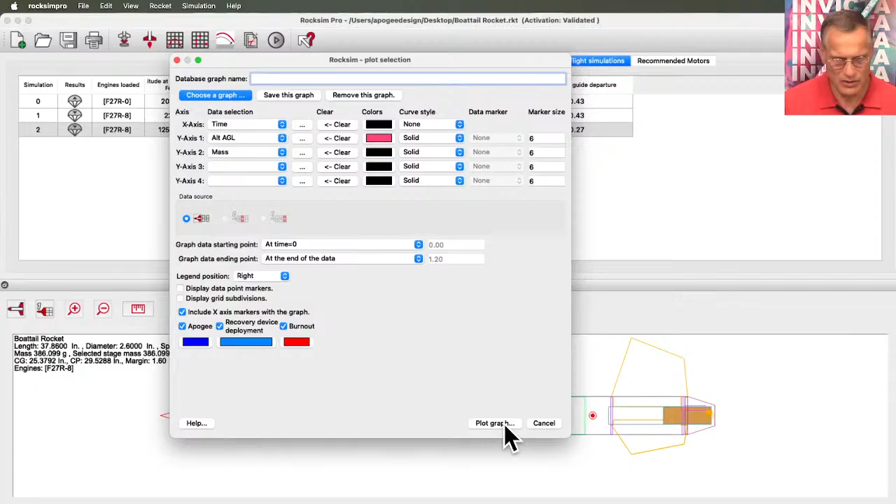For this one, you're going to have to go to the graphs. Along the x-axis, let's call it time. And on the y-axis, altitude. Where's altitude? Altitude above ground level. And then we also want to do mass. So here's mass. And we want to go to the end of data and plot the graph. Okay, so I'm looking at this mass curve. So we went from 386 down to 350 something.

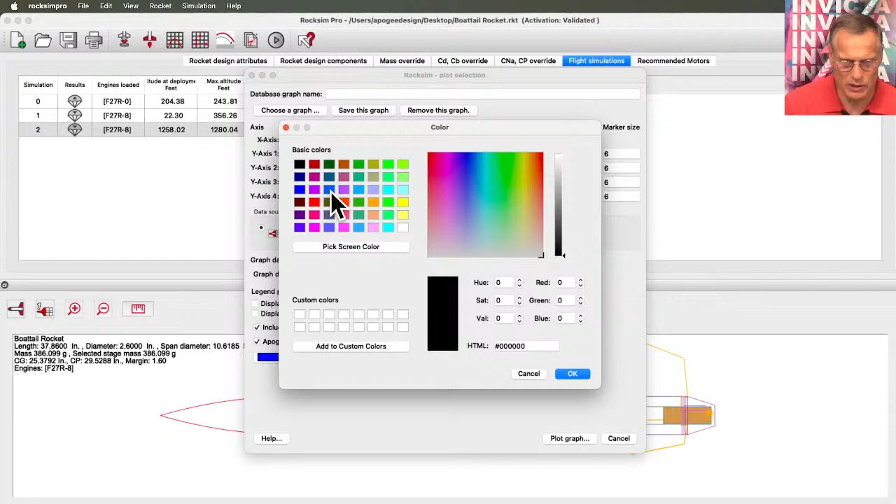How come I'm not seeing liftoff here? I need to see a thrust curve as well. Let's see, where's thrust? Total thrust. And let's make total thrust a blue line. Okay, then plot the graph. I want to zoom in here. So here's the thrust. It takes off, and there's some thrust, and then thrust drops down to 0 here. So here's burnout. And then we have apogee.

Where's the ejection? It should be ejecting right at apogee. I'm not seeing, I should see another, oh. I should see this at recovery device deployment, right here is this blue line. So this is when the drop mass should drop off. So what I should see is the mass come down and then drop another 20 grams. So it didn't drop out. Why didn't that pod fall off? That pod should eject.

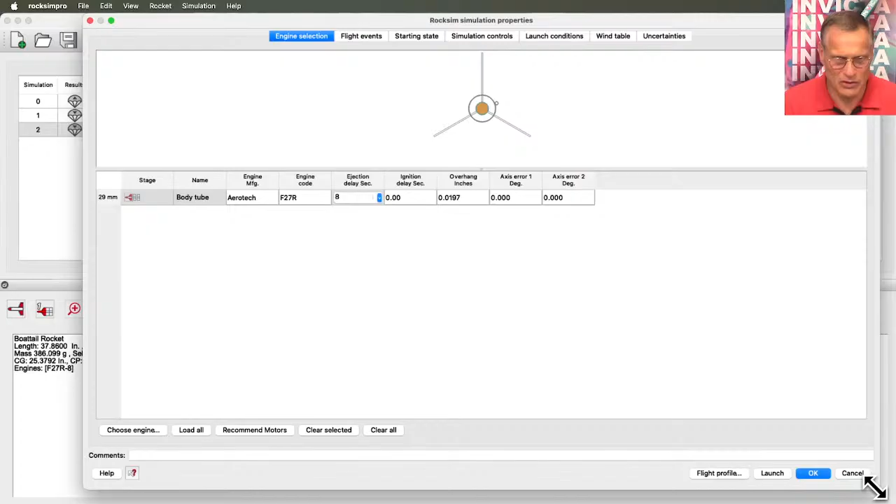So, and I'm not seeing it here, so cancel out of that. Let's go back to my components. My drop mass, I can say that this is a motor mount. And then we click OK. And now, if I go back to the motors, I can say my drop mass, I can load a motor into that. And if you do that, you'll see the fake motor. So what's special about this fake motor is it's got very little burn and almost no total impulse. So I can't make it 0 total impulse, but I can make it 0.001, which is kind of like not even a puff of air.

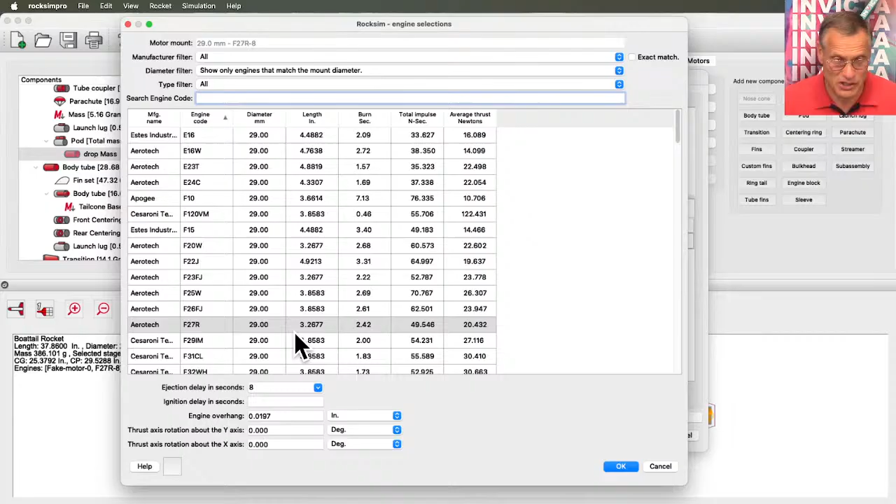So when this fires, it is going to, oh shoot, I got to make this a 2-stage rocket. It's going to kick that motor off. So right now, both of these motors are set to fire at the same time at liftoff. I think I can do it another way. So if I go to this Aerotech motor, I hope this is not too confusing. This is a really good question. So this one has a burn time of 2.42 seconds.

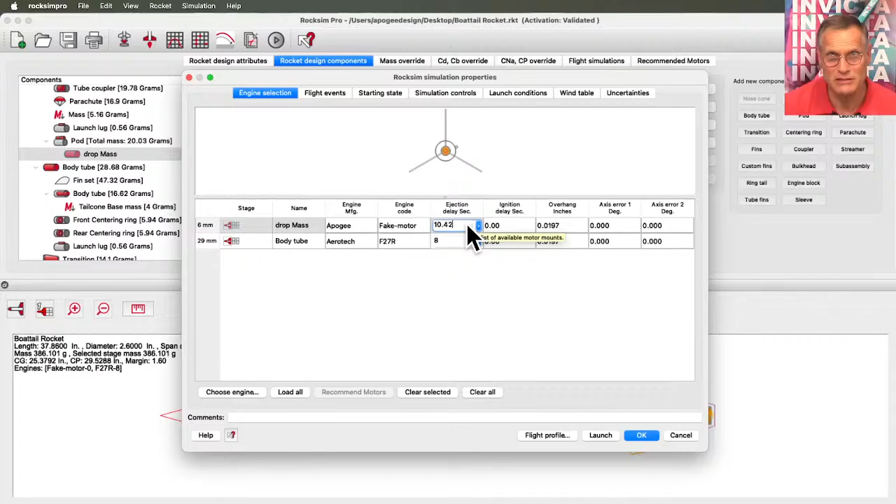And then we had the ejection of 8 seconds. So it was 2.42 plus 8, would be 10.42 seconds. So on this one, I want the ejection delay to be 10.42 seconds. So they're both going to ignite right at liftoff. They're both going to take off. And then at 10.42 seconds, right when the regular nose cone comes off, the other one is going to kick out and deploy that drop mass. I think it might have to be a 2-stage rocket.

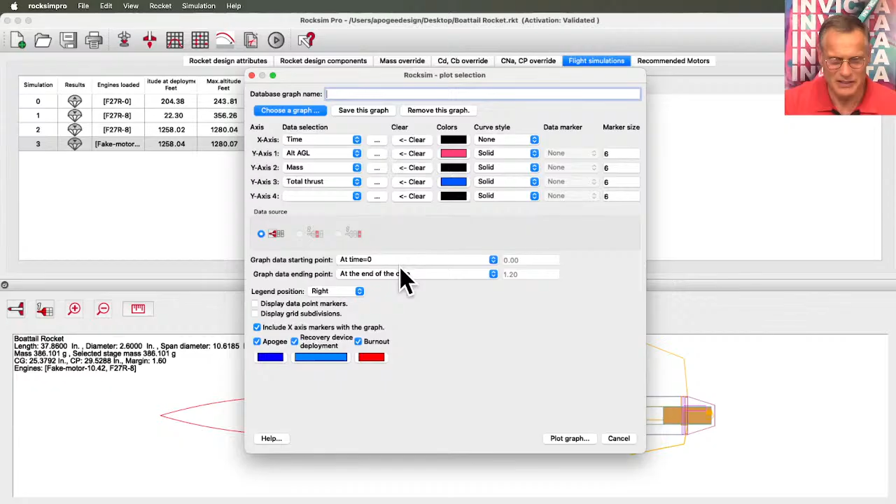Tiny Alfred Indy says, throw up your candy cane rocket design, and he says it's coming. Mark Sell says, unfortunately, I have experience in things not ejecting out of the body tube when they are supposed to. Like a parachute? I have that problem too. There's another person here. This is Andrew Wissat. He says, hi, Tim. It's Andrew from over the pond in the UK. And he gives me a thumbs up. Well, hello, Andrew. I don't know when you just joined us, but now it's time for us to leave.

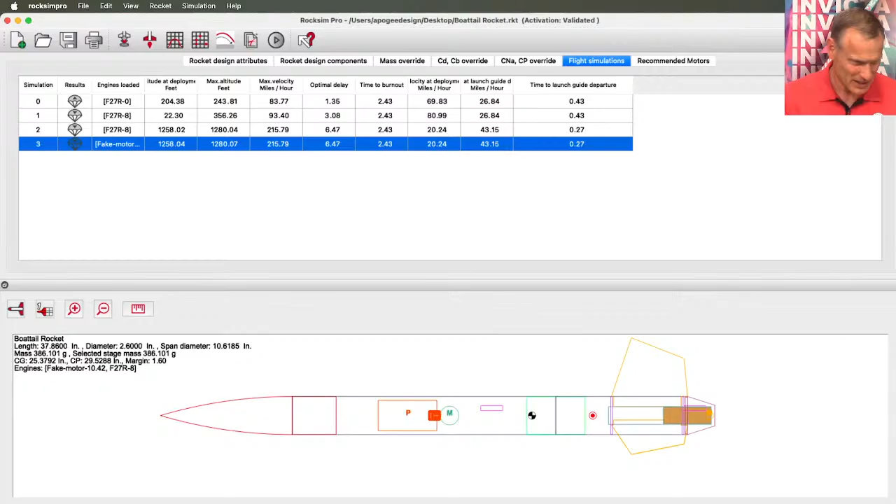Oh, man, that one gave me a headache. That was a really good question. So thank you for asking it. And that was, who was that? That was AB Hobbies. I like that question. That made me think. It woke me up. Whew.